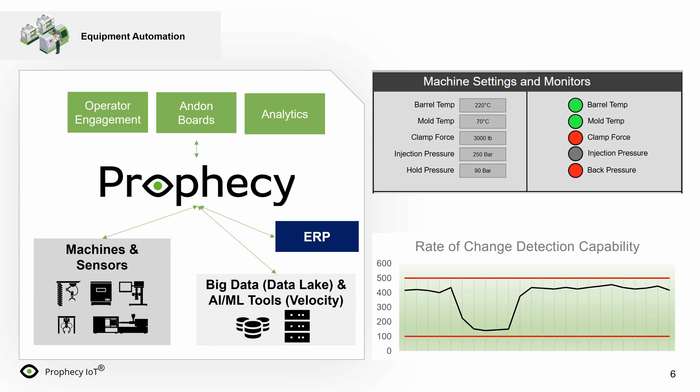Now, in terms of worker automation, we refer to that as the manufacturing hub. And this is the interface, and we're going to go into it. We're going to make some parts in it. So I'm not going to spend too much time explaining all the buttons just yet. But this is a disconnected type of environment.

The key takeaway here is we have unlimited users. So Prophecy is licensed based on a site license, combined with the number of connected machines. Well, if you're not connecting to any machines and you're just doing manual, it's one site license for all of them. It doesn't matter how many stations you put out there, or how many andon boards or anything like that. It's one fee.

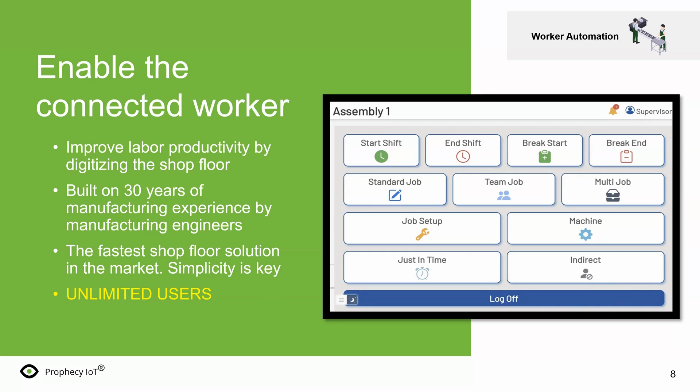We also have full supervisor capability. Where are my people at? What are they working on? Are they achieving their rates? I can do some error correction in there without having to go into SyteLine. If somebody made a bad quantity or a bad time, forgot to punch out, something like that, I can do that all within Prophecy. And I can also send out messages to all the stations out on the factory floor or to specific people: hey, come to my office, or fire drill at noon, or something like that.

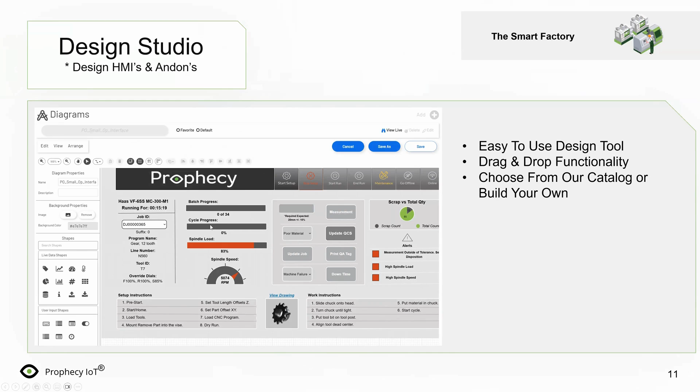We have our own design tool. Here, let me show you. This is our design tool. It's very, very similar to Mongoose. You're just dragging and dropping components onto the screen. So if I wanted to put a gauge on there, I would just click and drag it and put it wherever I wanted to, and then I would bind that to a specific value, a tag value in Prophecy, as we refer to it, to represent that data. So it's pretty simple to modify and to utilize this particular design tool.

Now, our screens are broken out into 3 separate categories. We have operator engagement screens. These are the ones that are accepting input. These are the ones the operators are using. How many parts did I just make? I just scrapped 3 pieces for this reason, or I'm clocking on and off of machines and so forth. And we'll see an example of one of these in a moment. We have live andon screens. So here's what's happening on my factory floor right now.

These will all auto refresh, so you can mount them to a TV and put them on a TV, mount a TV to the wall or in the conference room or something like that, showing me what's happening in my factory with simple color coding.

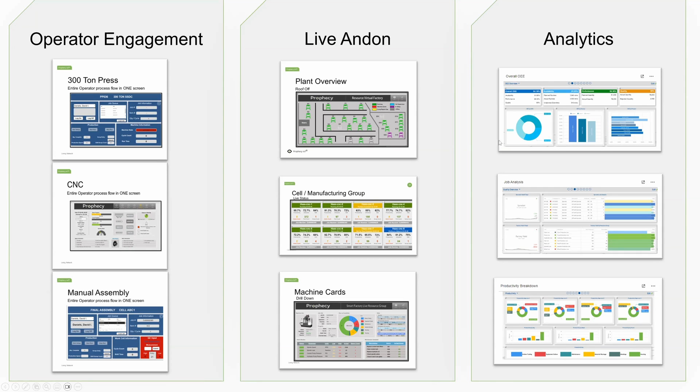And then lastly, we have a full suite of analytics. These are more for the back office. You're not really surfacing this for the operators, but these are more for the plant manager, VP of ops. How's my factory performing? What's my overall OEE? What's my scrap rates? And what are my trends, today, this week, this month, this year, and so forth.

And those are all included in the site license. We have an entire suite of key performance indicators. This list is not all inclusive. These are just the ones that get deployed in virtually every installation of Prophecy.

My employees, job time versus shift time. You paid them for 8 hours. How many hours do they actually spend on jobs? And then when they were running, were they hitting rate? What's my efficiency? Or what indirect codes were they on?

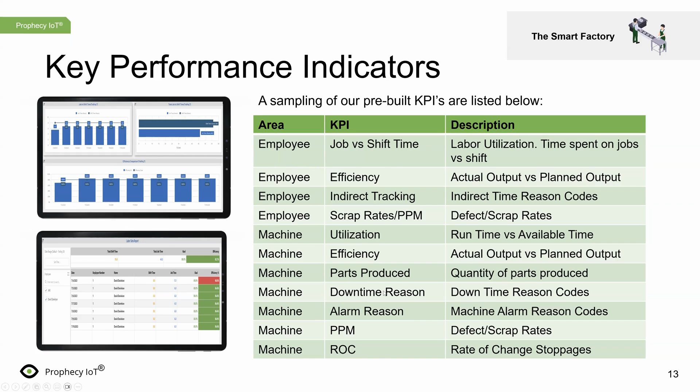And then dropping down to the machines, were my machines running? And were they hitting rates? And how many parts did I produce? What are my downtime reasons? What are my alarm reason codes? What are my rate of change stoppages and so forth?

So enough of the PowerPoint. Let's actually get into the software now. I'm already logged in, so I'm going to hit the escape key and end the PowerPoint show. And here I'm in the software already.

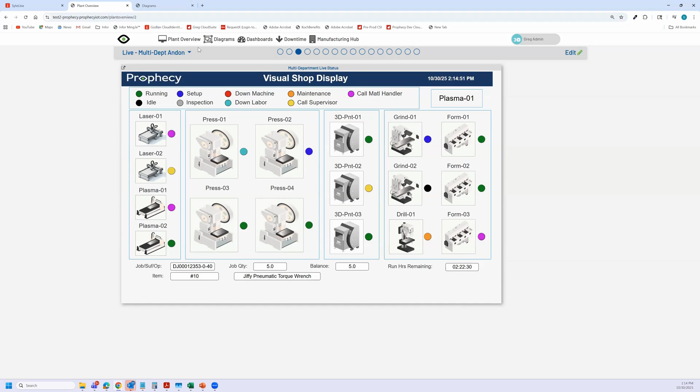So we've looked at the live andon screens. Now let's take a look at some of the dashboards that are out there, and let's start with the OEE.

Not very good. Quality is great, availability is great, I've got to go after the rates. Either I have bad standards or I'm not achieving the expected output. So yeah, I have a lot of run hours, but I'm really only earning 10% of those run hours.

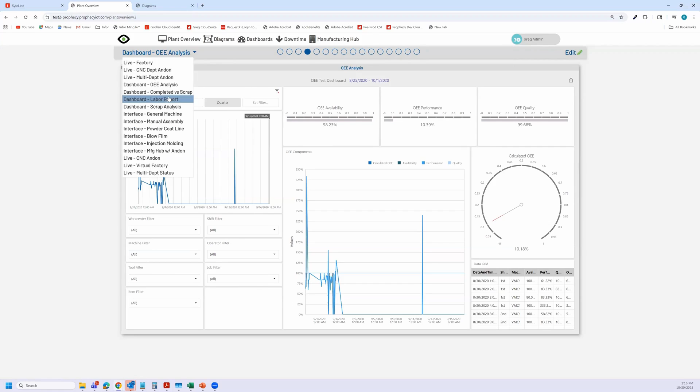So that was OEE. Maybe we want to look at completed versus scrapped - how many parts did I produce versus how many parts did I scrap? In here I have 105 pieces produced, I scrapped 10 on that day. This one was 80 and nothing, and 100 and nothing, and so on. So you can see it's very easy to see my completed versus scrapped numbers.

But now let's look at maybe a labor report. Not all of them have to be charts, here's more of a report. I've pulled David Danielson's numbers for the last 7 days.

And David worked 8 hours each one of those 7 days. Now I have a goal that everybody needs to have at least 80% of their paid time reported on jobs. Well here I can see he had 5.5, so I only hit about 69% on that day. And then he had 6.8 and so forth. He hit this goal the rest of the time.

So I have one day where he kind of slipped, but when I look at his overall over that 7 day period, he still ended up at 82.1. So I'm not really that mad about it, maybe this was just a blip or a fluke. But if I have somebody that's habitually in the red, I need to take some action against that. Again, it's very simple - I can see the colors from here on who's hitting the goal and who isn't. Very simple and fast to digest.

Now let's look at the scrap analysis. Our scrap, again, we're collecting all the data out on the factory floor, so we know the part numbers, the machines, the shift, and the operator and all that. We can slice and dice that information.

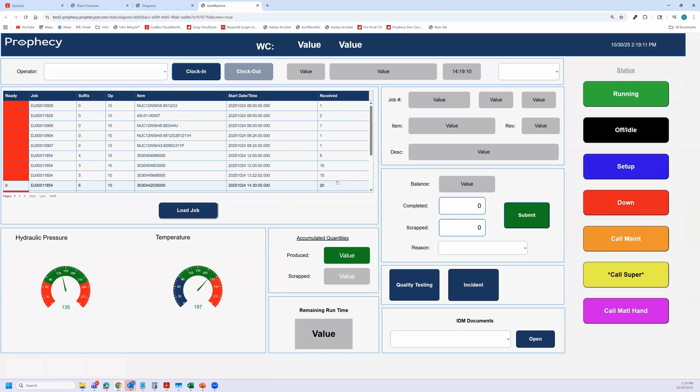I'm going to run this on a bigger screen here. I'm going to open this up and hit view so you can see the screen painting. My monitor is pretty big, so this is going to be a big screen right now. It's stretched, or what's called responsive, so it fills the entire screen. It doesn't matter if you're on a tablet, a PC with a 15-inch monitor, or a PC with a 36-inch monitor like I have here. It's going to resize accordingly.

So here's an operator interface. This is an example, not the only one—there are many examples, but this is the one we'll look at today of what the operator interaction would look like. In here, David Daniels is clocked onto this job right now, and I can see my job queue. This is coming right out of SyteLine. I'm currently running this KS001 blank, and it started up at 8 o'clock this morning. I should have gotten to this test diameter part at 10:27 this morning, then 13:26:49, and so forth. I can see what my job queue is.

Now, you can suppress this if you only want to show them the current job they're running, plus maybe the first backup, and hide the rest. That's simple to do—we'll just show the top 2 rows. Or if you want to see the whole schedule and let the operator pick and choose, you have to be wary. For example, this D2068 part number is really easy for the operator to run, but if I look at my start date, I don't have to start running this until November 26th based on the schedule in SyteLine. So maybe I want to hide these to prevent him from running this November part ahead of these 2 October ones.

Now over here, here's the job number, suffix, operation, the part number, the part description, the revision if it has one—this one doesn't have a revision in SyteLine. Here's my balance at 10,000—I haven't made any product yet. I have 4 hours and 5 minutes left of runtime on this particular part to make those 10,000 parts.

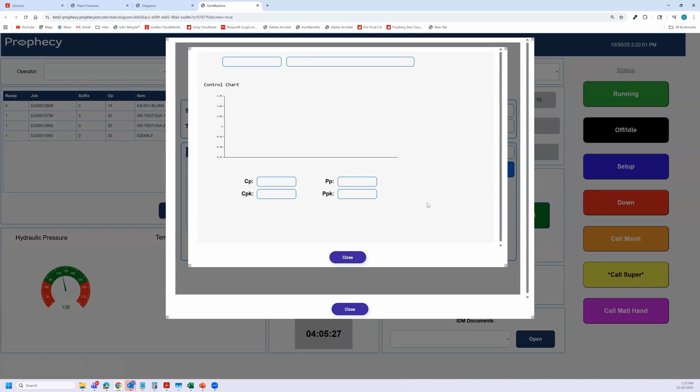I can also pull SPC data for this particular part. When I hit the control chart button, I'm pulling the last 25 measurements I've made on this part number for this feature, and it shows me the history for that. So here's my hole diameter, here's my spec, and here are my last 25 parts. The oldest one on this chart was measured back on August 26th at 8:06 in the morning. I can go through and look at all the individual data points if I want.

Down here, we're taking those data points and calculating a CPK and PPK based on these 25 data points. As I continue to measure them, this one little dip—this 0.1231 measurement—is going to fall off, and I'm going to see my CPK and PPK. They're already at a 5 sigma process, but it's going to go way up to probably a 7 sigma process once this one data point drops off. Just have to measure more parts.

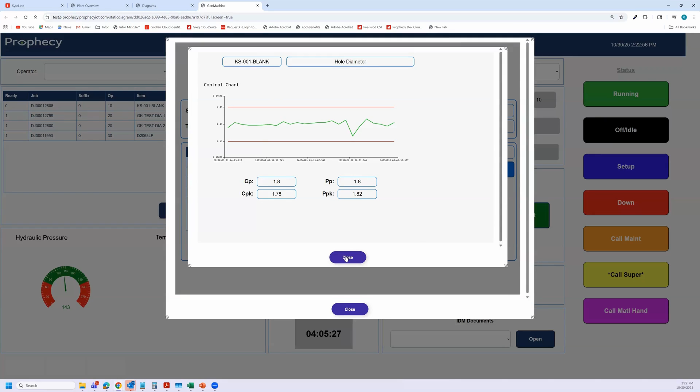So that is the quality piece of it. Again, fully integrated to SyteLine's control plan. So this data is the calculation of the inspections that have already been performed. This is reading in the control plan right from CloudSuite Industrial. I did a sample size of 1. If I made this a sample size of 5, I would see 5 iterations of each one of these features.

And as I'm recording the results, they disappear off the list. So this grid is nothing more than what's still left to be inspected. So as I'm doing measurements, that feature falls off of the grid. I also have a full link into the service module. So I can create an incident. Maybe the machine's making a funny noise or something like that.

I can hit the incident button, and that's going to pull up this screen that now the operator can put in some basic information. I heard a suggestion from one of our customers just a week ago or so that maybe we should put in an AI element or maybe a speech to text, which is going to be technically on them to put a speech to text thing on their device, which is fine. It's great. So the operator may not be the best typist in the world. They could just say what the problem is.

But if I was to fill this out and hit the submit button, I will create the incident in CloudSuite Industrial. I can initiate the workflows to notify maintenance that an incident's been created. And I'm going to transfer all this text that they put in here into the notes on the incident record in CloudSuite Industrial.

So now let's go ahead and make some parts here. So I have the 10,000 pieces to go. Let's say I'm going to make another 1,000 parts. So I'm going to say 1,000 parts here that I just made, and I'm going to hit the submit button. We're going to see the balance drop to 9,000 pieces. We're going to see our time also change. So now the 9,000, we produced 1,000, our time has changed.

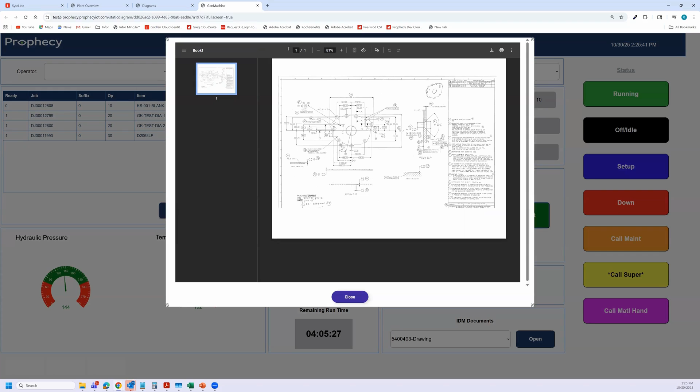Oh, I'm sorry, I almost forgot. I have IDM documents. So this is my link to IDM. If I pulled this part number up in the item master, I have 3 documents associated with it in IDM. If I want to pull up the drawing, I can just click on the drawing button there, and I'll hit the open button, and it'll pop open this window here in a second, and it will open up the drawing for that particular item. And this is all linked to CloudSuite Industrial.

I'm pulling it from the Infor item master context from IDM, but you can change that to whatever context is most appropriate for you. But we have full access to the IDM documents that you want to give the folks on the factory floor permission to be able to see.

Now, on the far right, I have the andon buttons. So the operator can call for a material handler, can call for a supervisor, can call maintenance. They can set other statuses. If we're not reading it directly from the machine's controller, we can set those buttons there. So I'm going to come back to my roof off view, and open up the roof off again.

And the machine that we're controlling here is this guy in the lower left-hand side. See how this one is already yellow, this machine down here. And I'm going to come back to the interface here. I'm going to put it on idle. So I'm going to click on the black button up here, and now you see the asterisk moved up to the black button. When I come back to the roof off view, it's black.

So that's how those andon buttons can drive the roof-off view or the andon screens, the department screens, and so forth. It can be driving that, so it's seamless for the operator to be able to interact with it. If we're not talking directly to the machine's controller, well, the machine doesn't necessarily know that you need to call a material handler over, that you just ran out of parts.